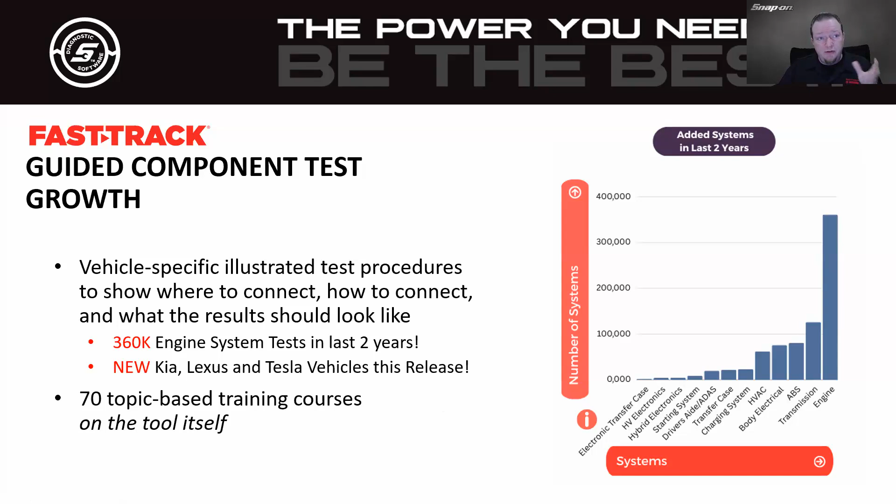If we look at this chart, added systems over the last 2 years, you can see that massive engine growth, but also well over 100,000 new tests in transmission, ABS - pretty close to 100,000 - body electrical, HVAC, and you can see how it goes down from there. This is added content to your tool every single time we update.

Also inside the Fast Track Guided Component Test, we have new enhanced component test meter test instructions. It's a very high resolution picture that shows you exactly where to connect on the tool. In this case, ground in channel 1 - it shows you where to hook there.

In this case, it says connect the black test clip to the negative terminal, and so on and so forth. If we have to back probe, I'll show you an example of that when we go live on the tool. But it's much easier and more streamlined with the setup instructions on the tool.

Plus, don't forget the location images. We started adding these a few updates ago, and with this release, over 3,000 new locations added, giving you access to over 22,000 total images available within guided component tests. Many locations also offer multiple images that provide a wide view of the area, like here's the engine compartment.

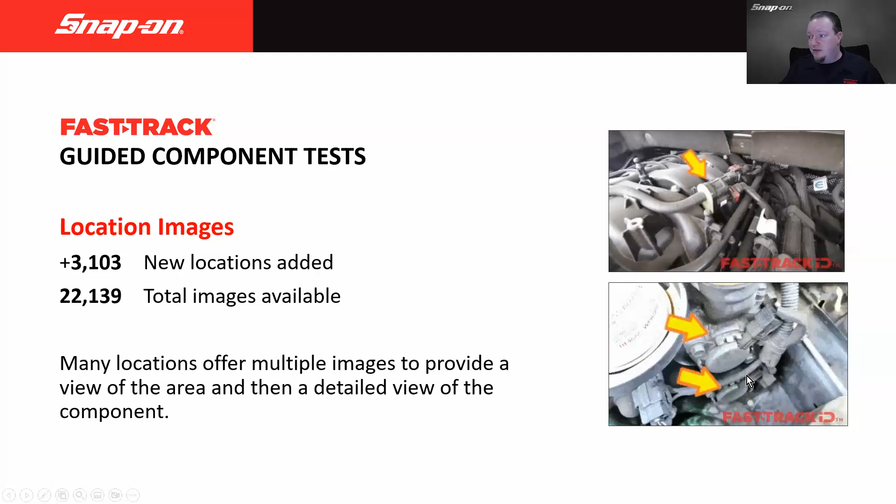And then it'll give you a detailed view a lot closer to the component. So here's an example of a purge valve. And here's a couple examples of cam actuators for the variable valve timing system. You can see those in there, and it shows you exactly where it is right on the engine.

Very helpful. And don't forget service resets and relearns. There are now over 1 million service resets and relearns available within the tool. These are job-based repairs. What do I need to reset? What do I need to do a relearn on? It's going to give you access to the core repair itself, plus any other associated components, such as if I replaced the windshield on this vehicle, so now I need to relearn the camera.

It's going to walk you through all that, what you might need to do there at a quick glance. And don't forget Fast Track Intelligent Diagnostics. We have PID flags for non-engine systems. We added that in the last update, and we've added considerably more. There are now over 5 million PID flags across the tool, across the codes, across the vehicles that we cover, and like I said, over 700,000 more just in this release.

We started with engine, and that's been for quite some time since we started, but added transmission, brakes, hybrid vehicle, electric vehicle systems, tire pressure monitoring, body electrical, and more.

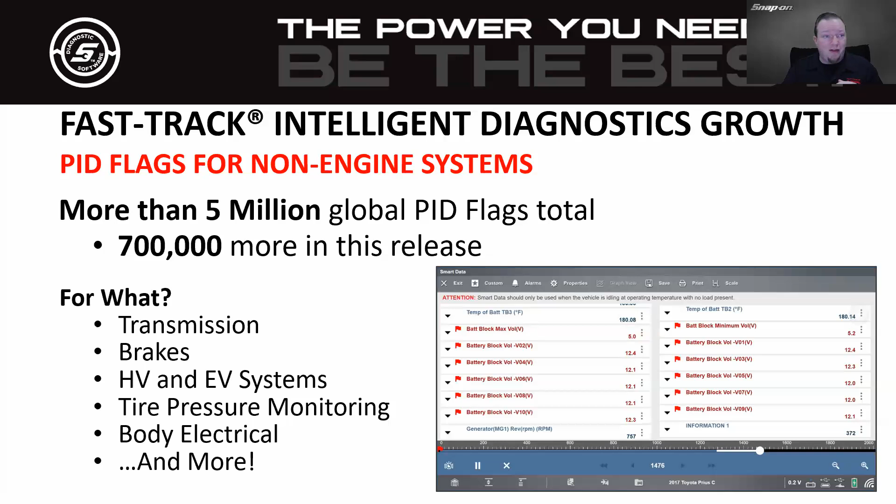And speaking of electric vehicles, we have a new make with this release as well. So we have Tesla. Welcome Tesla to the Snap-on Diagnostics tool family. That is going to be available with this fall release. As soon as you get it in your tool, you will have access to that. We'll talk a little bit more in detail about that in a minute.

Also, some new models, either through vehicle communications or through guided component tests. The Alfa Romeo Tonale, we have vehicle communications coverage now, a new model for them. The Kia K5, we've added new guided component tests that we didn't have before. All the Lexus NX and RX vehicles shown here have additional guided component tests. We never had guided component tests on those models before, so now we do.

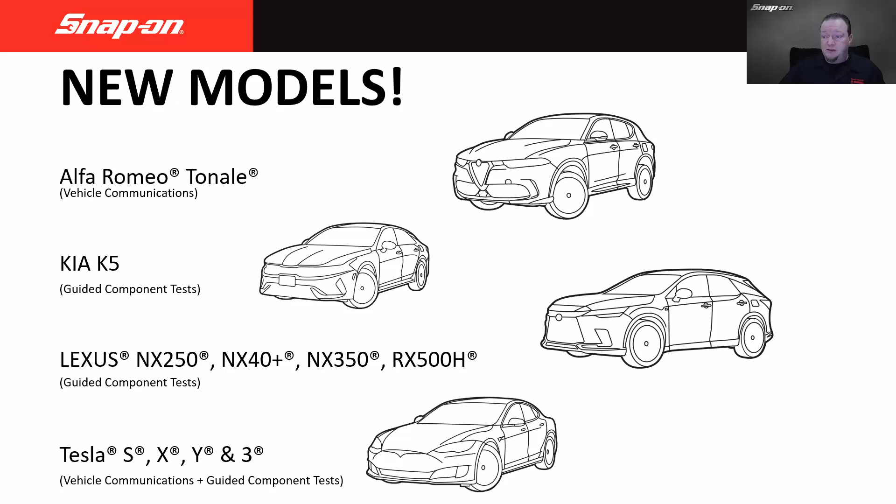And then Tesla's S, X, Y, and 3 models have vehicle communication software, like we said, a new make, and guided component tests available for it as well. So huge with this release.

And I think we'll see a little bit even further back on some of these. So always know that you're getting enhanced coverage on even older models, especially the ones that you're seeing in your shop right now.

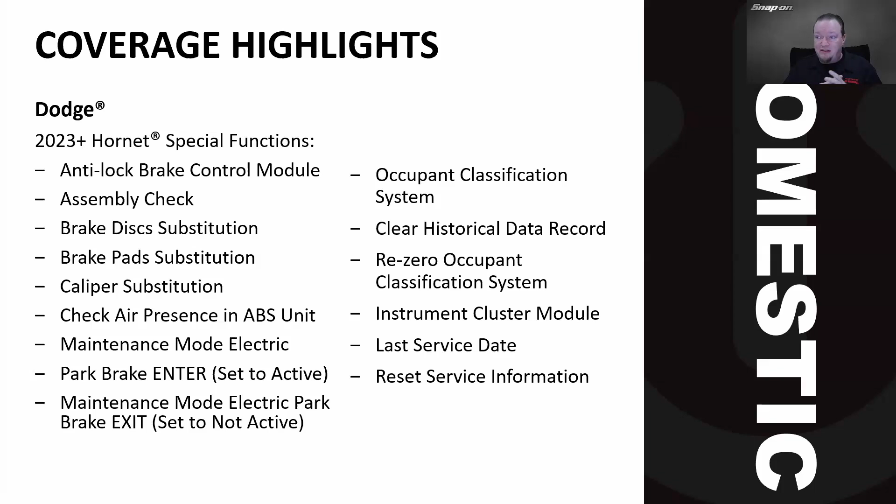Also have the Dodge Hornet in there, so 2023 and newer Hornet. That's a fairly newer model for Dodge. You can see all these different modules listed that were added, and some of these are test special functions added to the vehicle. For the anti-lock brake control module: assembly check, brake disc substitution, brake pad substitution, set the last service date, reset service information, instrument cluster module, etc. You can see it all on the screen.

Ford, very large update for Ford, so we actually have a couple slides to talk about it. PMI has been a big deal. In order to replace a part, you often need to copy the data that's on the existing part and then essentially paste that data into the new part. That's called programmable module installation. It takes the configuration out of one and puts it in a new module.

We've added 2011 to 2017 Mustang power steering control module, so if you do a power steering rack on that, you need to do that. 2010 to 2018 Ford Focus restraint control module PMI, so on the active restraints - look at that, back to 2010. Like I said, going back in years.

Also 2023 and newer F-Series and F-Series Super Duty, new engines covered there. We've got the 5.2 Raptor, the 6.8, the 7.3 liter gas engine, as well as the 6.7 liter diesel that we've had. That's in 2023 and newer.

Body control module, 39 new variants of body control module that could possibly be offered there. Some manufacturers just have variables of variables for different modules - it could have 50 different part numbers. So we have 39 more body control modules that you weren't able to get into before.

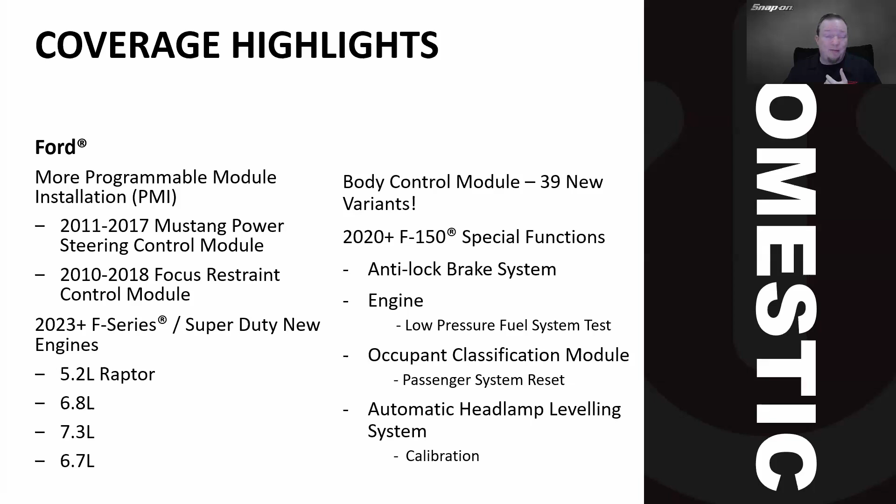Now you can. 2020 and newer F-150 special functions: ABS in the ABS system, low pressure fuel system test as well, occupant classification module, automatic headlamp leveling calibration. That's important for the automatic headlamps.

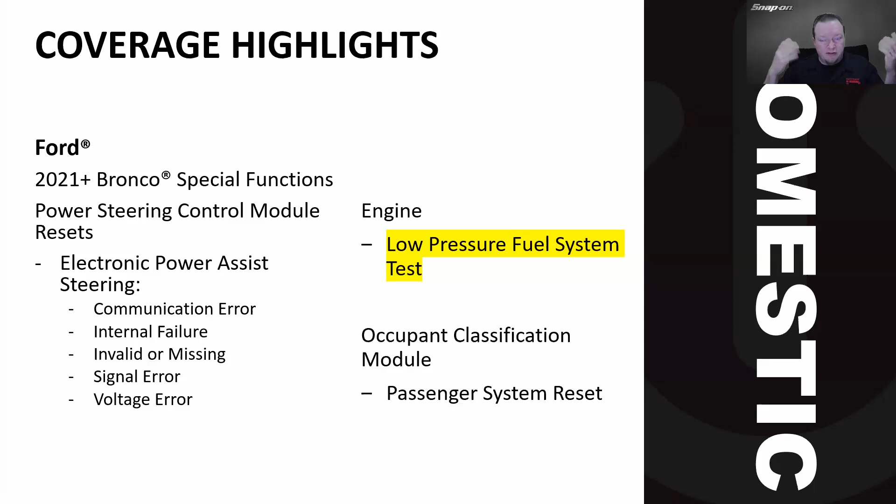We're going to talk about that in a minute when we go live on the tool. But that is very helpful because it'll pressurize the system and then it will check for leaks - basically check for a leak down. It'll have a timer, and it checks for whether or not you have a leak on the low pressure side of the fuel system. So that can be helpful in diagnosing a drivability problem or a low pressure problem.

And as I said, Tesla - new OEM for us, and new models added. We got 4 new models. Tesla's a little bit different, the way they communicate and the way they diagnose the vehicle. I've been doing a lot of research on this lately because I have a class coming up on it.

As far as the 2012 to 2020 Model S and the 2016 to 2020 Model X, those vehicles have a 16-pin regular OBD2 port underneath. The reason they're kind of unique is because they don't have to have that port on the car because they've never had a gasoline engine in a Tesla. So they didn't really have to do it.

And on some models, like 2021 and newer S and X and any Model 3 or Model Y up until 2024, they don't have an OBD2 connector. They have a proprietary connector, and they also have a very powerful diagnostic tool in their actual touchscreen in the car. This car is basically just a rolling computer.

So on those vehicles, we give you instructions on how to find alert codes and what the alert codes mean, how to unlock the gateway on the vehicle, and how to enable and disable service mode. So you can actually get in and do some of those functions and testing on the vehicle. I think that's pretty cool. I got to play with it about a month ago, and it's pretty powerful.

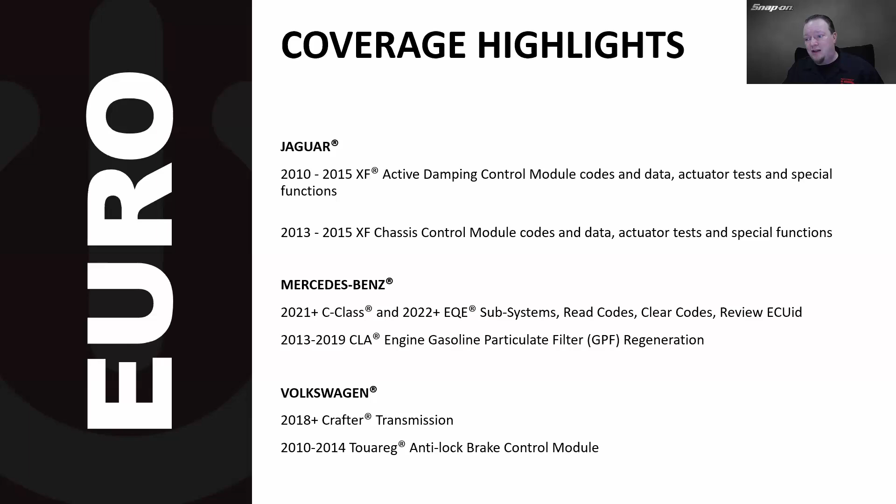Volkswagen 2018 and newer Crafter, that's their Sprinter van type thing, transmission. And 2010 to 2014 Touareg anti-lock brake control module. So that's the highlights for vehicle communication. Let's move into guided component tests and see what we have there.

For Hyundai, we have the oil level sensor, active purge pump pressure sensor, and active exhaust solenoid. And we also have new location images on the Tiburon.

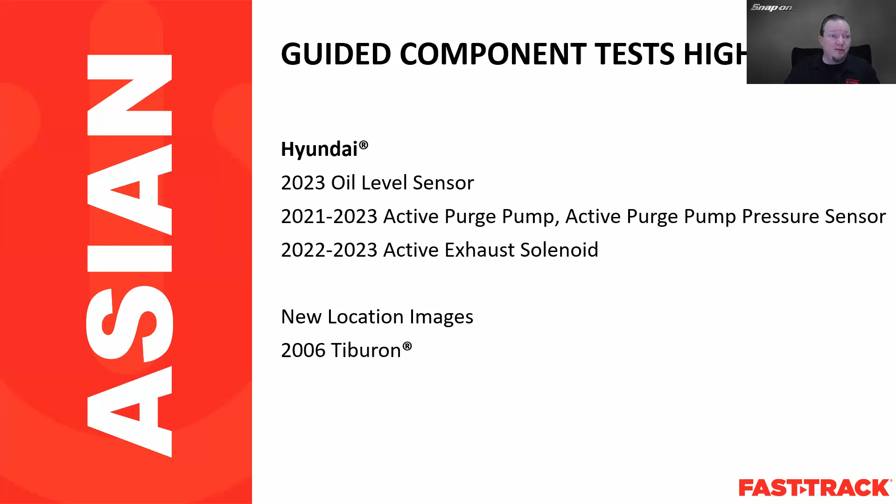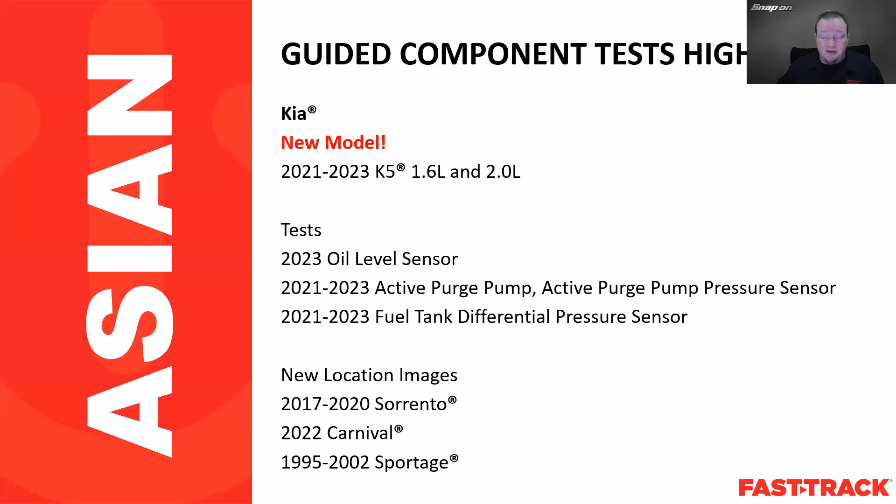Kia K5, new model, 1.6 and 2 liter test coverage for oil level sensor, active purge pump, fuel tank differential pressure sensor, and new location images on the Sorento, Carnival, and Sportage shown here. That's very helpful. Those color graphic images show you where things are.

As far as Chevrolet is concerned, 2023 Colorado engine, Savanna, Silverado, increased coverage for transmissions. I know that's a big deal for the 6, 8 and the 10-speed transmissions. 2023 Silverado 1500 3-liter diesel, that's that smaller diesel that they have in the 1500. And then you can see the other engines added here.

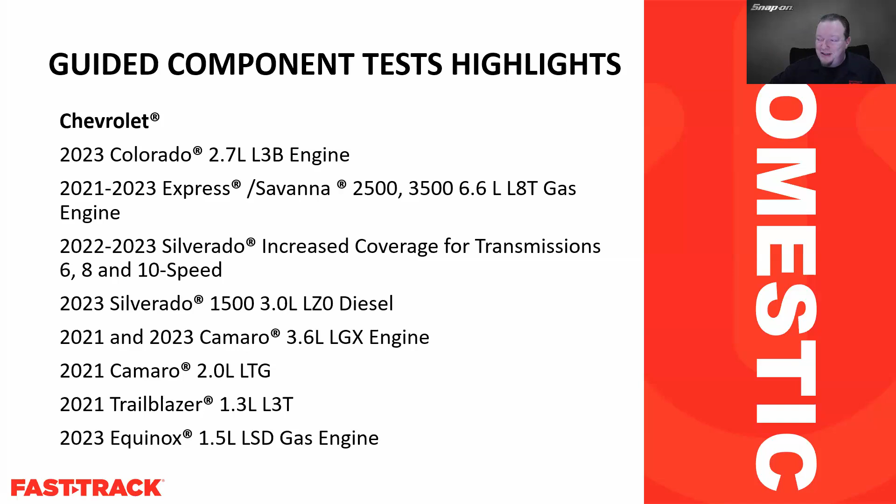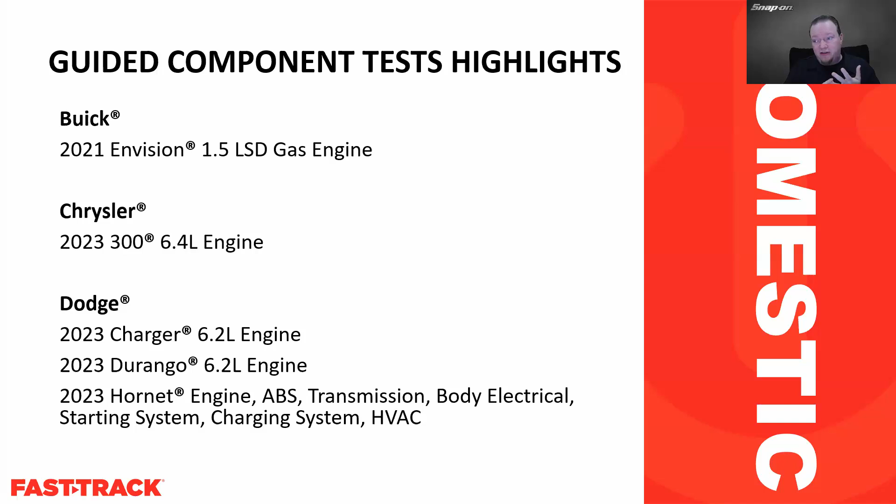We're getting longer lists as we go, so I'm not going to read through every single one of these because you can see it on the screen. But Buick Envision, 1.5 liter engine, Chrysler 6.4 liter in the 300, and the 6.2 liter in the Charger and the Durango. And then the Hornet added a pretty large update. Like I said, that's a fairly new model for them, so engine, ABS, transmission, body electrical, starting system, charging system, and HVAC tests all available for that vehicle.

Ford, massive update for Ford when it comes to the guided component test for sure. So we can see F-Series, F250, F350, F450, F550, the 7.3 liter gas engine, 6.7 liter diesel engine. I mean, we had these engines supported before, but these are the newer model years, 2022s and 2023s. We see 2020 to 23 Escape, 2 liter.

2020 Explorer, 3.3 liter engine. The Police Interceptor, 3.3 liter engine too. I know that's a big deal for fleets and municipalities, so that'll be helpful for them. Transit Connect, there's a lot of those around too. And the full-size Transit with a 3.7 liter engine. I know there's a ton of those running around as well. So, as well as a bunch of different Mustang engines and combinations there as well. You can see the rest listed on the screen.

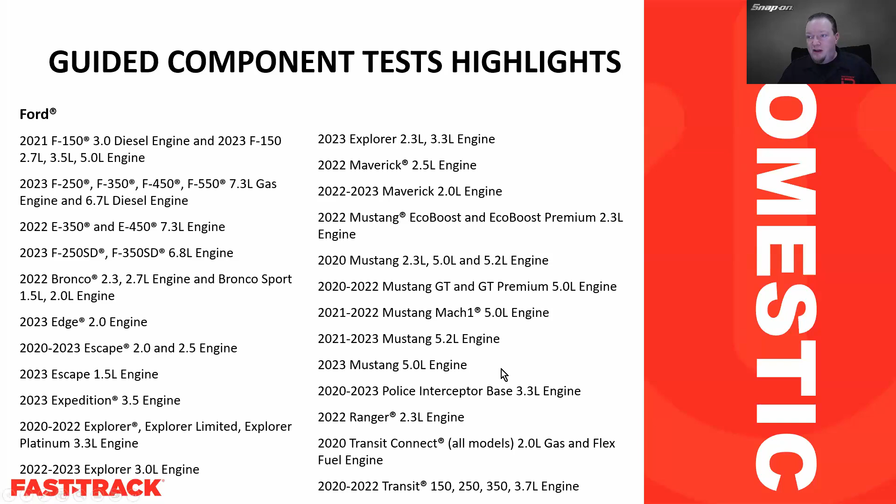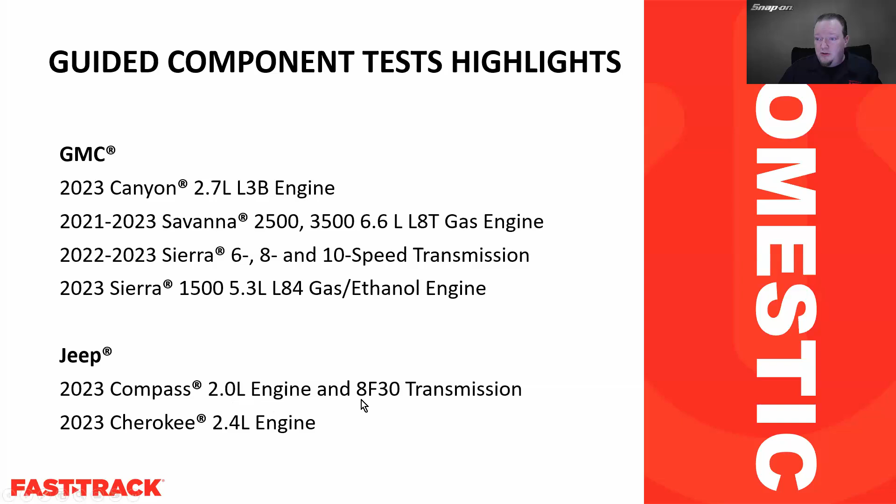And then Jeep, 2 liter engine and 8-speed transmission, and the Cherokee 2.4 liter engine on 2023.

And Tesla, as we said, haven't had Tesla coverage up until now, but we not only added vehicle diagnostics coverage, we also added guided component test coverage. So it's on the ABS system to start, and of course we'll be adding more as time goes on. It's just only so much you can do in 6 months, right? So ABS module, brake fluid level switch, brake pedal switch, brake booster, iBooster, wheel speed sensor, and more.

So these are the usual guided component tests that you would be used to, telling you where to hook it up, how to hook it up, and what it's supposed to look like on the screen.

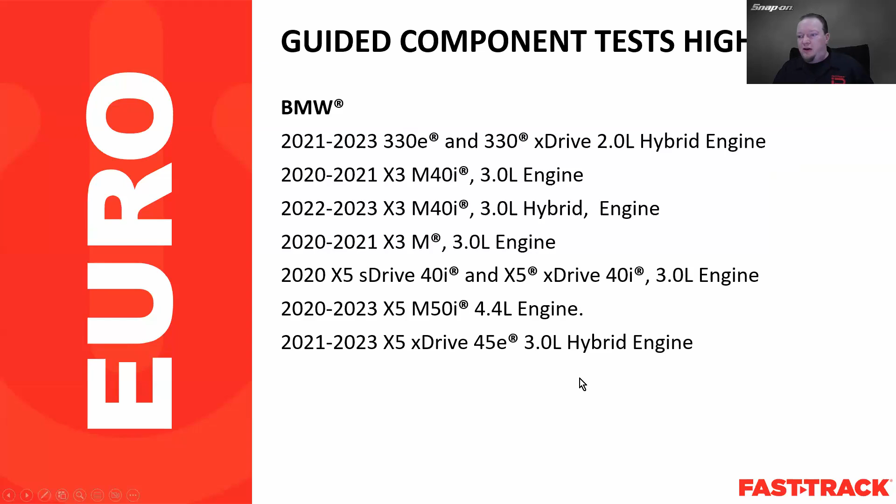All for those European models, moving on. We can see all these different models with added engine coverage: xDrive 40i, X5 with 3 liter engine, 4.4 liter engine, and 3 liter hybrid engine, going back to 2020 up to 2023.

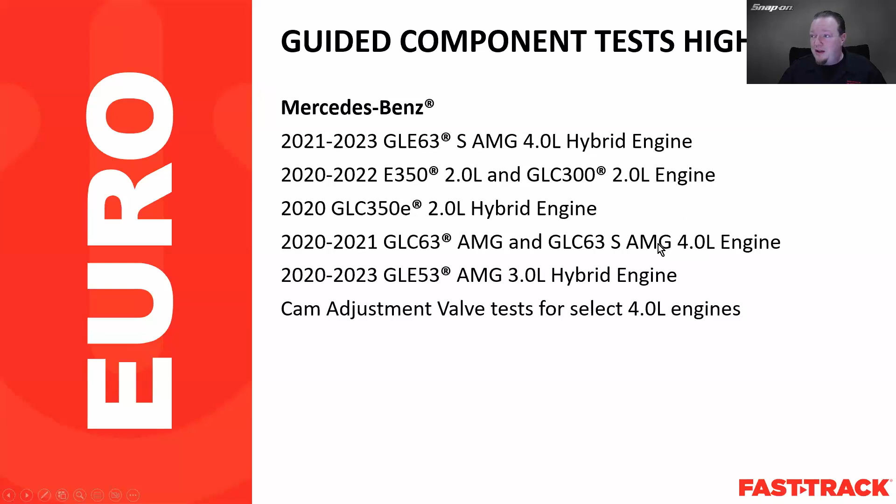Mercedes has lots of new coverage here too. AMG 3 liter hybrid engine, cam adjustment valve test for select 4 liter engines, which is pretty important if you want to adjust the valves on those. You can see all the other coverage that's available and added.

All right, let's move on to new and enhanced features because there's a fair amount of those as well. Let's take a little sip of water here. We got a lot going on, like I said.

So Solus Plus, if you are a current Solus Plus owner, or if you end up purchasing a Solus Plus with 2024 or newer software, we now have the ability to switch it to Spanish, going from English to Spanish. I know we have plenty of Spanish speakers in North America, so this will be very helpful. I know they've been asking for Spanish on the tool for a while. You have asked and we have listened and we have provided. So here we are, 24.4, with that update.

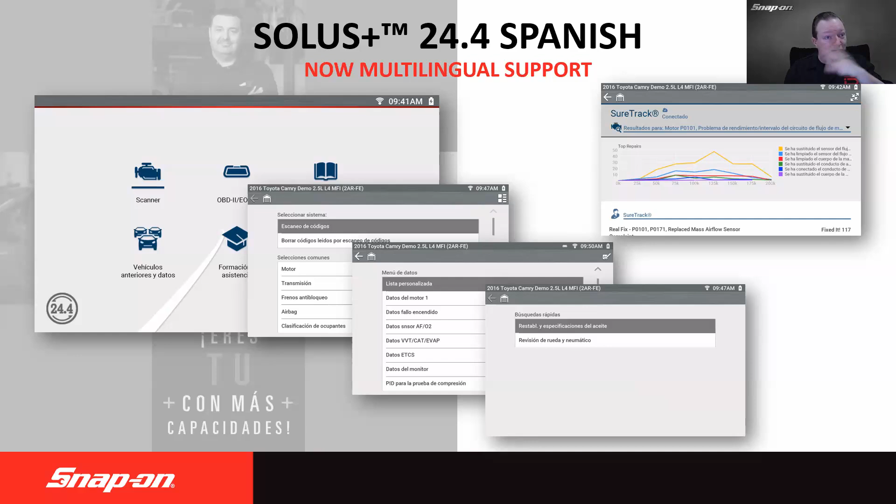There is now Spanish support on the Solus Plus only, and I'll show you why that is in a little bit when we go live on the tool. I'm going to show you how to turn it into Spanish and Spanish back to English, and we're also going to look at what the tool looks like when it is in Spanish.

Also, piggybacking on that, Snap-on Cloud now supports multilingual support. That is for your vehicle system reports, your pre and post scans, and also your ADAS reports, so your ADAS calibration reports.

So if the tool is in Spanish, it will upload the pre-scan in Spanish. But what if my service writer wants to send it to a customer, and maybe the service writer doesn't speak Spanish, or maybe the customer doesn't speak Spanish? You can go at the report level and switch it to English, and it'll print out in English. Or vice versa, if it uploads in English, I can switch it to Spanish, and it will go. That's pretty helpful.

And that's, like I said, on the report itself. I will show you how that works in a little bit.

Also with Snap-on Cloud, not reporting related, just the navigation buttons and so on, you can now toggle between 8 different languages, including French and Spanish, because I know that's important in North America. French for our Canadian friends, and Spanish for any of our Spanish-speaking friends. If you go to the upper right-hand corner to switch it, the site text itself will change.

The user-generated content, so your reports and screenshots, do not change. Those keywords won't change, the file tags won't change, but the navigational stuff will change into 8 different languages, including Dutch and German and so on. Once again, I'll show you that in a little bit.

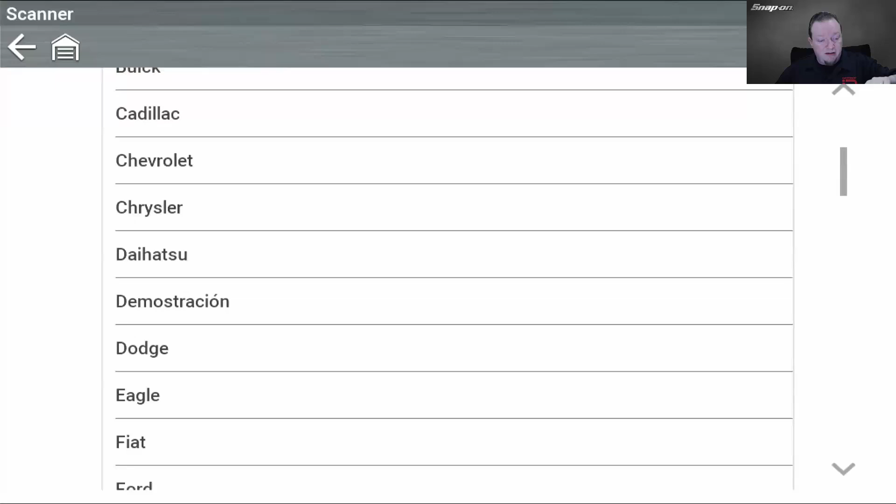Now if I go to my main menu and into my scanner, we'll go to my demonstration vehicle, Chevrolet, pull up my Tahoe here. You'll see that the selections at the top of the screen are in Spanish as well. Then I will accept, and it says it's in demo mode, continue. Then I will do a code scan real quick.

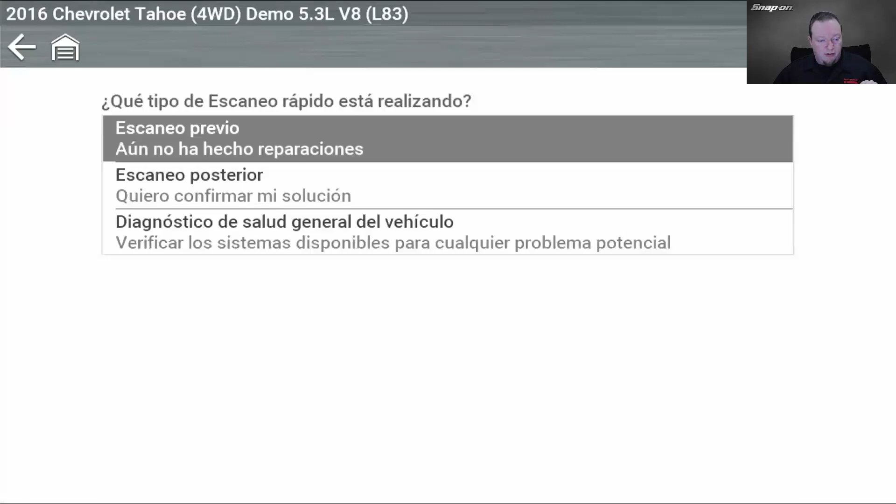Pre-scan, do not want to add extra information. There we go through our scan. It's going to save it here in a second. And then you see we can scroll through. We see transmission and anti-lock brakes and airbag, etc., all in Spanish.

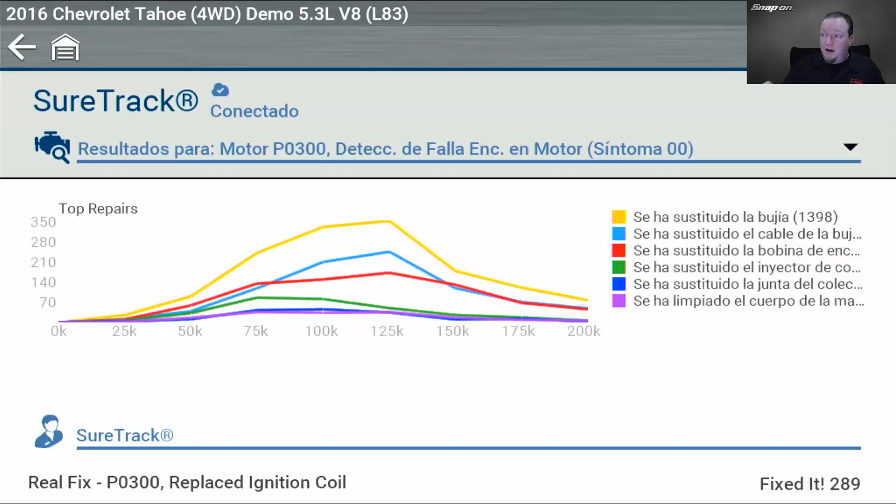And then if I select the code, we will see that some of the SureTrack information is in Spanish. Not all, and this is why I said it's going to be just on Solus Plus for the time being, because the graphs are in Spanish. And then if we scroll down, we'll see the real fixes are in English, because there are a lot more of these articles and a lot more of that information.

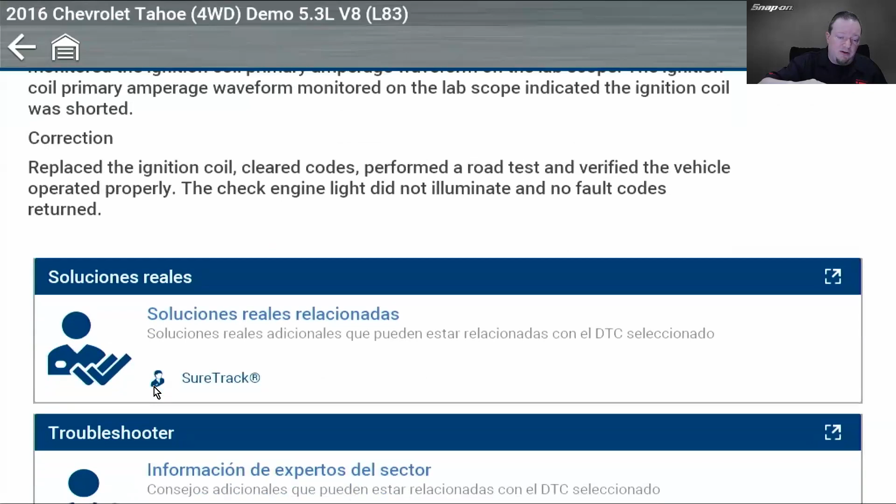And that's all cloud-based, so to translate all that is a much bigger lift than translating everything else we've translated. So you may see that in the future, but as of right now, Solus Plus is where you're going to get it. Now you do see the buttons are in Spanish as well.

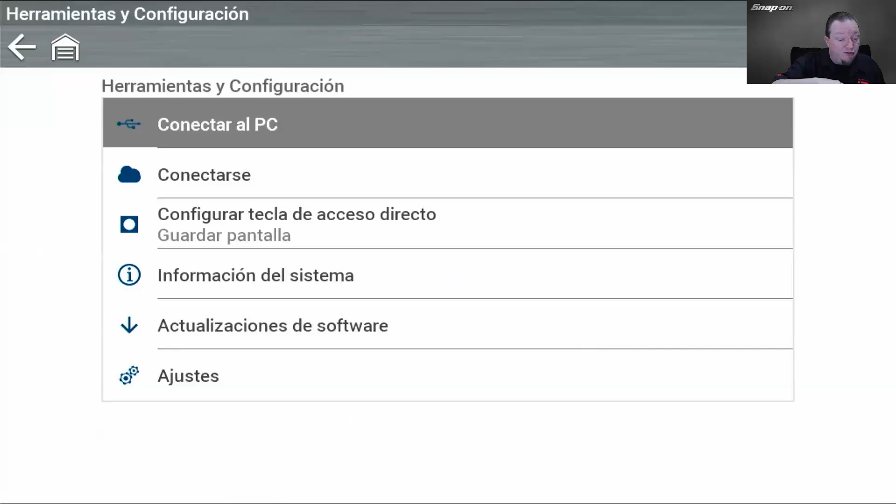Okay, so let's switch it back. I'm going to exit my vehicle, going to go back into settings. I am going to go to Ajustes, or Ajustes—I'm not quite sure how to pronounce that, but that is your settings right on the bottom.

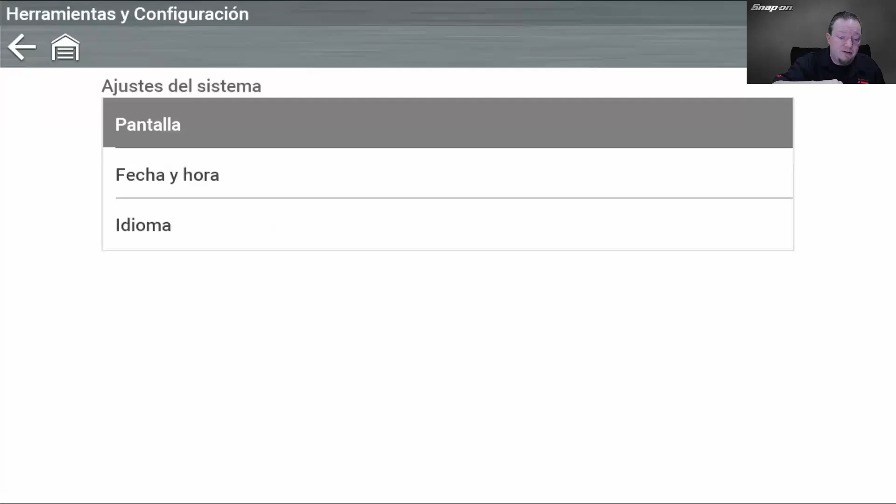And then we'll go to System Settings, which would be the top one there, and then Idioma is language. Go to Idioma, switch it back to English, and there we go. So that's how we switch our tool from English to Spanish and back again.

All right, clear out of that. And then next thing I want to do is show you Snap-on Cloud.

So in Snap-on Cloud, you'll see I have all these system reports. Some of them are in Spanish, some of them are in English, and you see I have it filtered down by the tool. So automatically when you upload anything to the cloud, it tags the part number of the tool so you know what tool it was on. So in this case, the EESC 337 is Solus Plus.

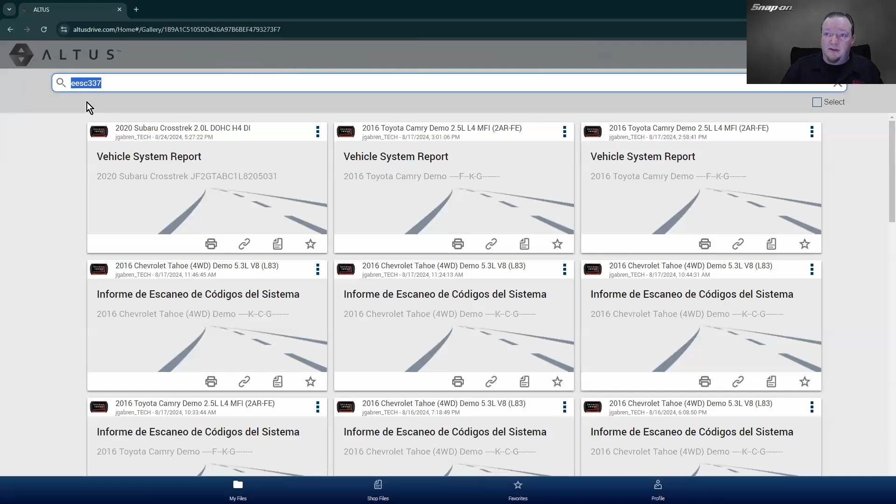I'm going to select this vehicle system report right here that is in English. And you see over here, we have a switch. So we have English, and then we can switch it to Spanish, and we see it switches right away. I can click on the report, it's going to open it up, and it is in Spanish.

I can download it, and I can print it. If I close that, I can switch it back to English, click on the report, and you'll see it's now in English. And once again, download it and print it that way.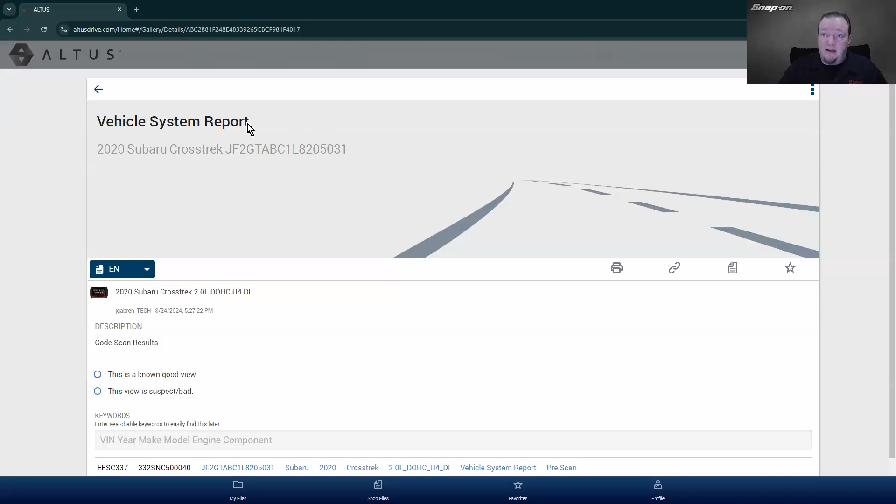Also, globally, like I said, I'm going to back out of this real quick though. So globally, we can go up here on the right-hand side and see where it says English. I can change it to German, English, Spanish, French, Italian, Dutch, Polish, and Portuguese. So that is for the guiding around the website type thing.

So if I wanted to change that to Spanish, we have selection there. Like I said, it's a lot of the navigation buttons and things. So down here, like archive and so on is in Spanish, but the reports, like I said, do not change. And actually, I'm in Google, and it says, do I want to translate it from Spanish to English? So there we go. Let me switch it back to English, and you'll see it switches back to English.

Also, didn't mention this earlier, I believe we added this in the spring: multi-select. So if I wanted to delete multiples of these, you can change or download multiples of these. You can hit select, then select multiples of them, and then download or delete them from there, just with the selection icon that's over there. So we actually had that in the spring, and I know I didn't talk about it, so I'll talk about it right now. All right, so that is that.

Now let's get to the scan tools. So let me see, I'm going to go on this one over here. There we go. All right, so this function, it was not even available on 24.2. So I'm going to go in here and pull up this 2023 Dodge Charger for guided component tests.

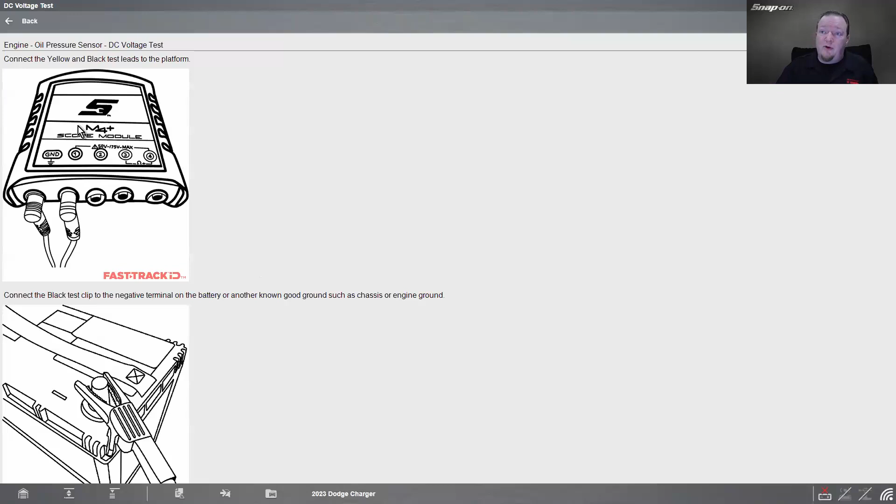If I go into a DC voltage test, that is going to show me those new connector images or connection images. So here's where I hook up on the scope module. Now this is on a Zeus Plus I'm looking at it on.

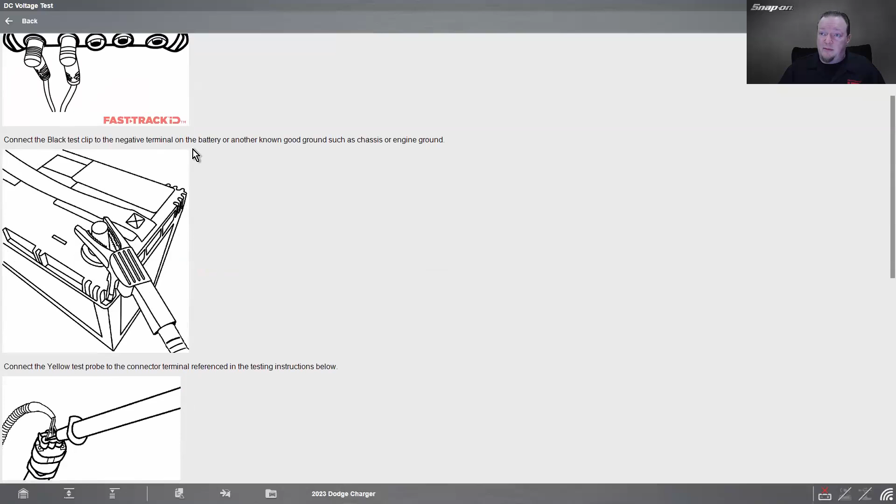So it says ground and channel 1, so yellow and black test leads to the platform, color-coded. Connect the black test clip to the negative terminal on the battery or another known good ground, such as chassis or engine ground. So it shows it connected to the battery there. And then it says connect the yellow test probe to the connector terminal referenced in the testing instructions below. And we can see back probing there.

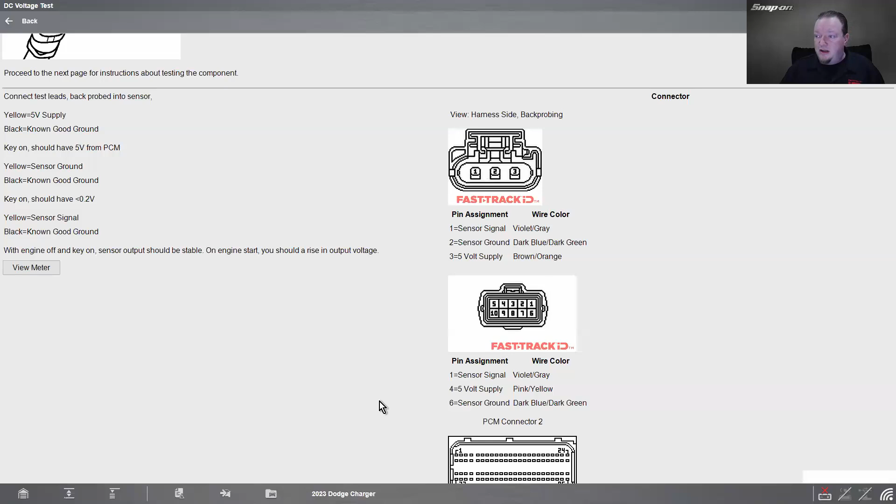And then if we go down here, we see our connector views there. So I want to go to 5-volt supply, sensor ground, or sensor signal, depending on what I'm testing. And then it tells me what I'm supposed to see. For sensor signal with engine off and key on, sensor output should be stable. On engine start, you should see a rise in output voltage. So you would test it however you need to test it. Also gives us the PCM information there as well.

Okay, so let's show a difference now. So let me pull up my 24.2. So this is my spring release, I haven't updated this one yet. I'm going to pull up my Bronco. Activate that.

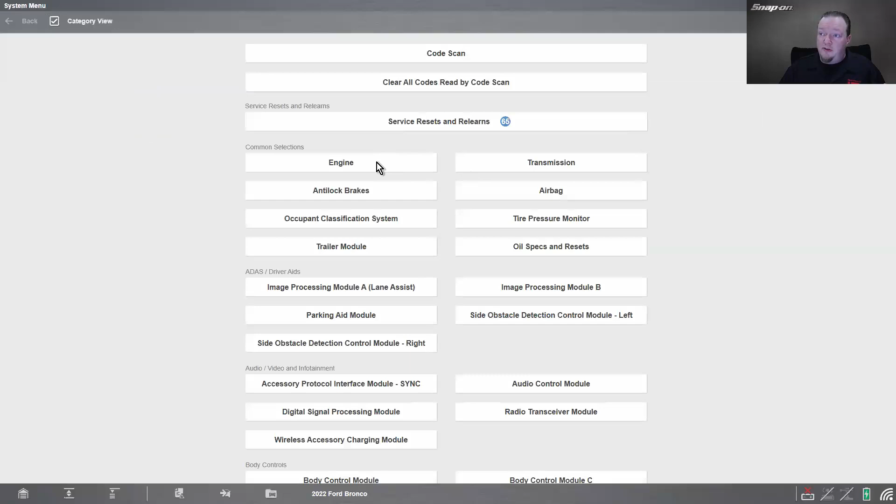And in engine, we are going to go under functional tests, and we are going to look at special functions. And we see there are 1, 2, 3, 4, 5, 6, 7 functional tests in here, including programmable module installation, that PMI that I talked about that's been so very popular. But we don't have that fuel leak test that I was talking about.

So let's switch back to my updated Zeus. Go into my vehicle history, and where'd it go? There it is. Wait. And we'll go into engine again.

Functional tests, special functions, and now you see we have 8 tests, and one of them is right here, gas low pressure fuel test for the direct injection system. So I click on that, need to turn the ignition on.

So for the test purpose, the powertrain self-test should have previously been done to detect DTCs associated with a low pressure fuel system, high pressure fuel system, fuel injector, or fuel rail pressure sensor. Procedure involves fuel handling. Prepare for fuel spillage at all times, just in case you do have a leak. Always observe fuel handling precautions. The following conditions must be met: ignition must be on, key on engine off. Make sure the vehicle battery has sufficient charge to carry out the test.

Continue, it's actually behind security as well. And then it's going to automatically go through this test. So it turns the fuel pump on, turns the fuel pump off, checks the pressure. Right now it's doing a 10-second leak test for a gross leak.

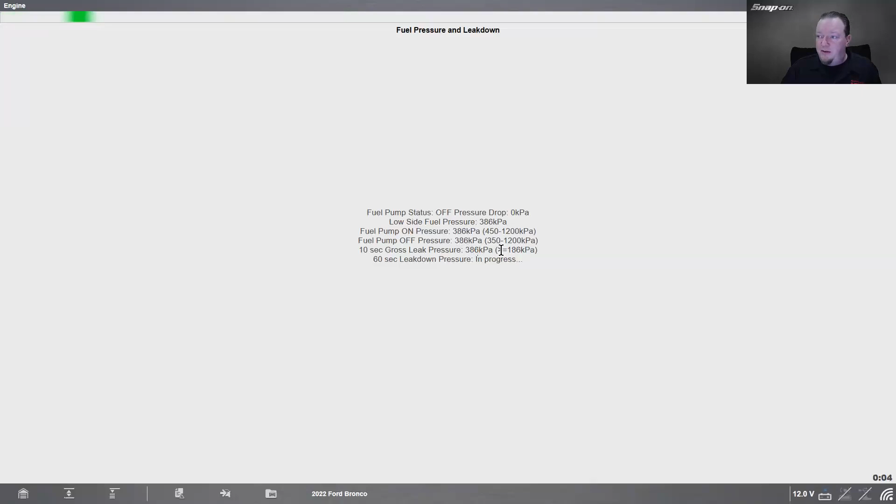This one would be normal because it's supposed to be between 350 and 1200. And this would be fine because it's greater than or equal to 186. So that means that passed on the gross leak. And then the 60-second, once again, 386, greater than or equal to 186. We're good.

But if it did leak down and it gave me a result, then we would know that it's leaking somewhere and we would need to go fix it. We might find the fuel somewhere spilled out on the vehicle. So I think that could be a pretty helpful test in those situations, and that was also on the F-150 as well.

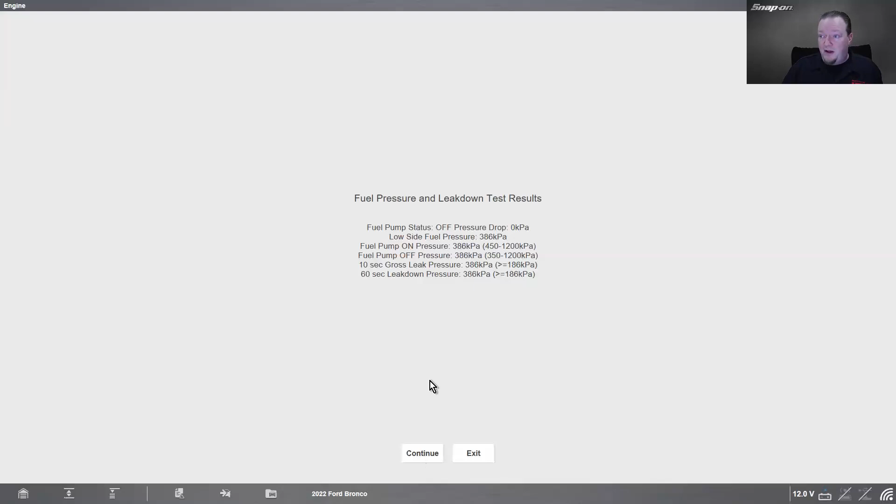So pretty helpful. And then the last thing I'm going to talk about is going to be our Tesla. So let me see this one right. Model S we're going to start with, 2016 Model S 70D. And we're going to go into Scanner.

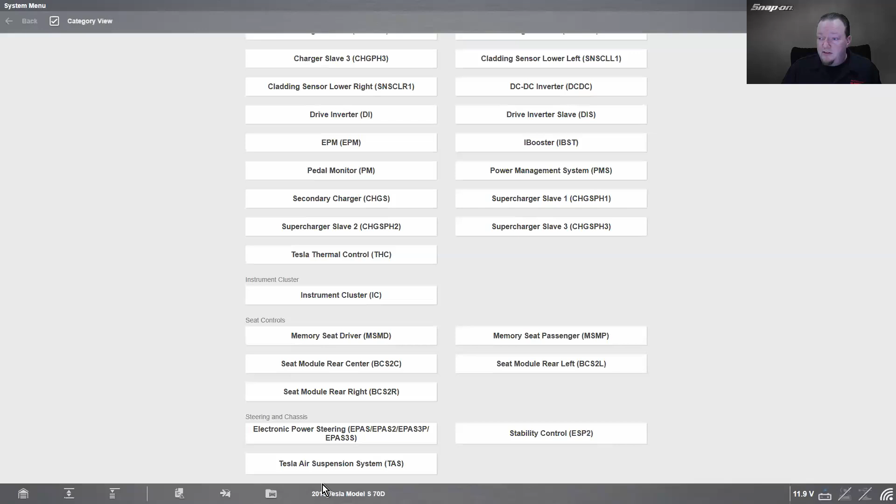In this case, we can query the network and display active ECUs or just display all ECUs that are possible on it. So I'm just going to do all ECUs since I'm in simulator mode again. We could do a code scan, clear all codes, and then we can go through here and see all the different modules that are available on the vehicle. Things like air suspension, codes, functions. So you can actually go in there.

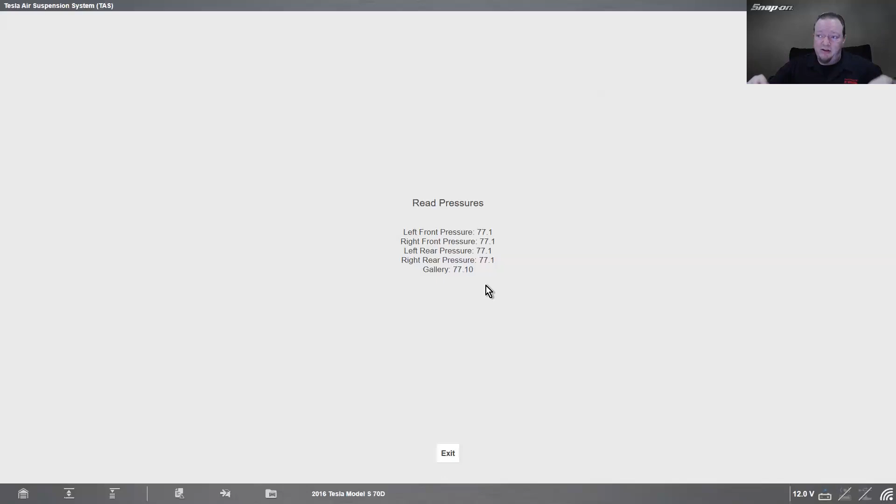A lot of these you're going to find the solutions to some of their issues or problems are going to be resets. So you do a hard reset, reset the ECU, a soft reset. In this case, for diagnostic purposes, we could also set the ride height - very high, high, standard, low, or very low. There's also a pressure reading that'll give me the actual pressures of where they are in my air suspension. So that's helpful for diagnostic purposes.

And then let me show you another example for, let's see, the battery management system, right? It's kind of just a giant rolling battery for all intents and purposes. So go into special functions and we can see all the different functions.

So the way they present their codes is completely different. No P codes, B codes, C codes, U codes. It's like a proprietary type code that actually gives you a little bit of information with the code definition. But if you have some of these codes, like this one or that one, it resets that back to factory level. Plus we have soft resets, hard resets again, reset contactor stress counter, clear contactor stress results, and so on.

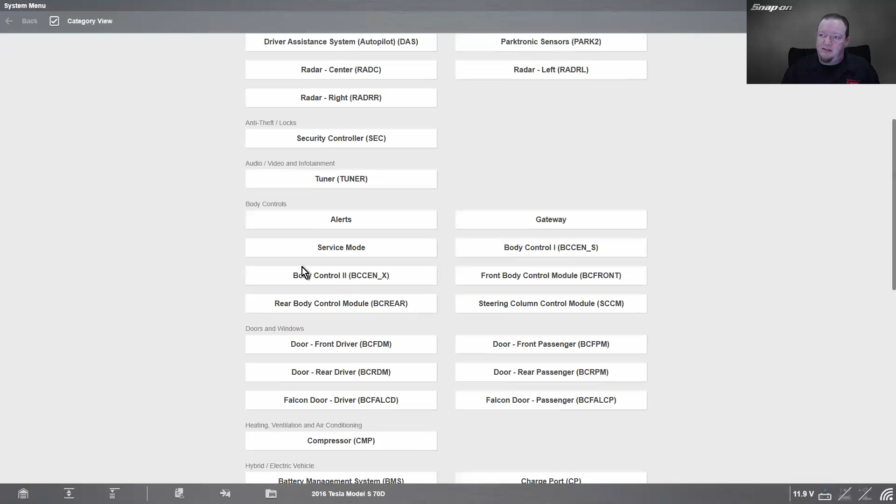And then back up again, and then I'm going to show you this. So in here, these three right here, alerts. So to display service alerts, first enter service mode and tap service alerts. Service alerts are essentially your codes that you're going to get out of the vehicle. So you can get some of this out of the touchscreen.

So service fix alerts can be important issues and non-issues. It's common to see service fix alerts that are not important, and customer alerts are the same as those that show up in the display during normal vehicle operation. And then you can go from there to learn what it's supposed to be.

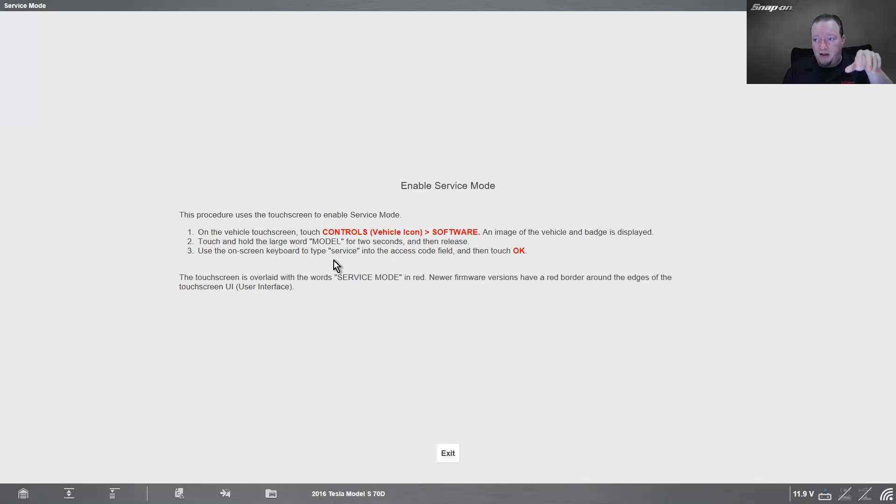Also, service mode - talked about that. So we will tell you how to enable and disable service mode. You do need to enable service mode in order to hook up the scan tool and communicate with the vehicle. So this uses the touchscreen to enable service mode. It tells you how to do it here, gives you the instructions. You press and hold and you enter in a service word, and then it'll allow you in. Actually pretty quick. And then to disable it, it tells you how to get out of it.

And then gateway - for some functions, you need to unlock the gateway. Now, this is not a secure vehicle gateway as we would think of with like Chrysler or something like that. This is just the gateway to like the router basically for the vehicle. Sometimes you need to unlock that. It will unlock it for a maximum of 90 minutes to do functions. So it tells you how to do that.

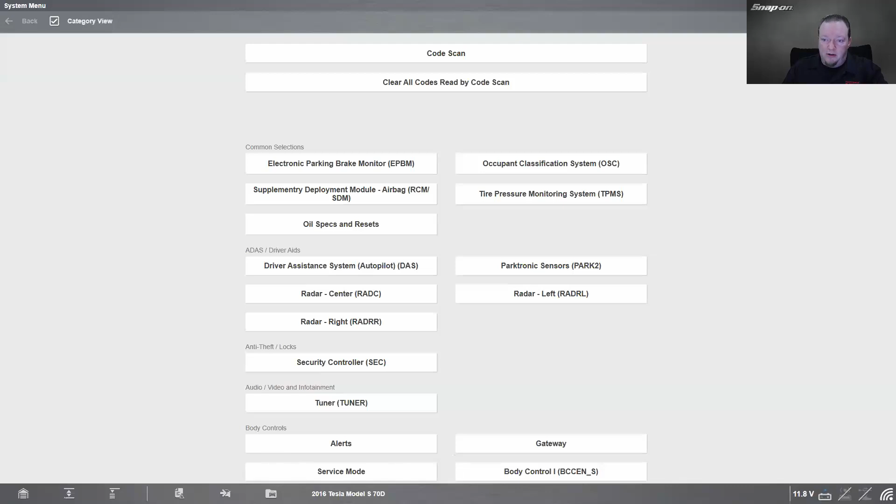Also, we have guided component tests in there. Like I said, it's on ABS to start. We'll add additional systems as we go. You can see ABS module, parking brake module, iBoost pedal sensor, brake fluid level switch, brake pedal switch, etc.

And then also, you may or may not have known, if you have a subscription to ShopKey, ShopKey actually has Tesla coverage as well. So we're going to bring this through here.

There are many different models, and every single model is broken down by the repair order analysis. I don't know if there's a ton of aftermarket shops necessarily working on these, so as we go, the repair order count will build. Right now we've got 7, but it's things like pads and rotors, tire pressure sensors, headlight bulb. I've noticed, from pulling up a lot of these doing research, a lot of control arms, door locks, and power window motor regulators too. There seems to be a fair number of those.

But if we go into TSBs, we can see it has all the recalls, battery management system, all the normal TSBs that you would expect on a non-Tesla car. And then the DTC index.

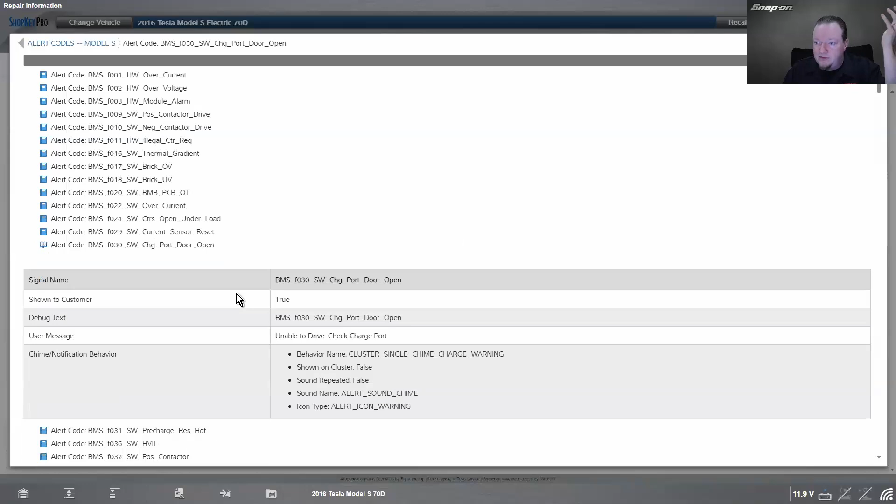This is how they present the codes to you. You see their alert codes, and it gives you the module as a shorthand. Then it gives you the different conditions, like charging port door open, and tells you the parameters of that condition. You would need to go into Tesla information to find out the diagnosis, which is usually a software update or a reset, most times, from what I've been seeing.

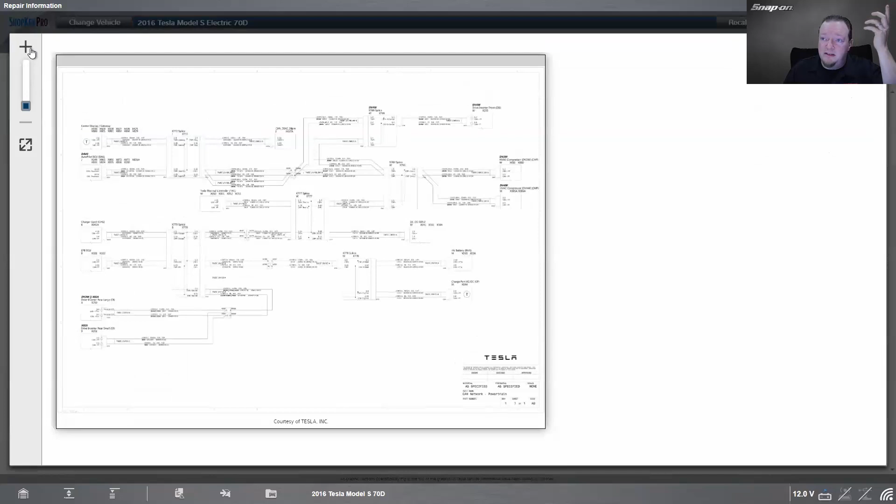It also has wiring diagrams. Right now it's the Tesla wiring diagrams, so if I wanted to go into the powertrain CAN network, for example, it's the Tesla wiring diagram. We can see how they run out. So those are available on ShopKey as well.

All right, one more thing. I'm going to go to our Model 3, a 2020 Model 3. Remember how I said the Model S and X up to 2020 have a DLC, so you can just plug it in with the regular 16-pin connector? The other ones have a proprietary connector, but you can also access a lot of the information, or the majority of it, through the touchscreen on these cars.

This gives you access to get into service mode or gateway, just like we showed before. Here's how to enable service mode, here's how to disable service mode, and here's how to go into the gateway. So on those cars, you would do most of the diagnostics through there. We'll just give you the instructions on how to access that.

So with that, that is our 2024 fall release. Just a couple more things before I go.